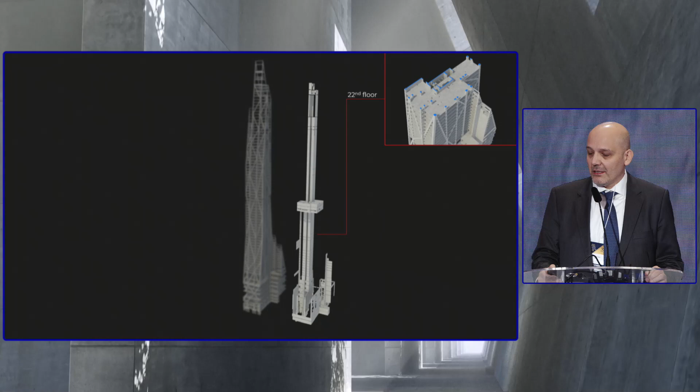If you don't need them, we don't use them. This is another lower floor. This is...

So this is where you see this transfer of the core. Right now we are at the 7th floor with the amenity space. We have a pool on the south side. This is a pool space. And we started to transfer our main structure in the tower right above the...

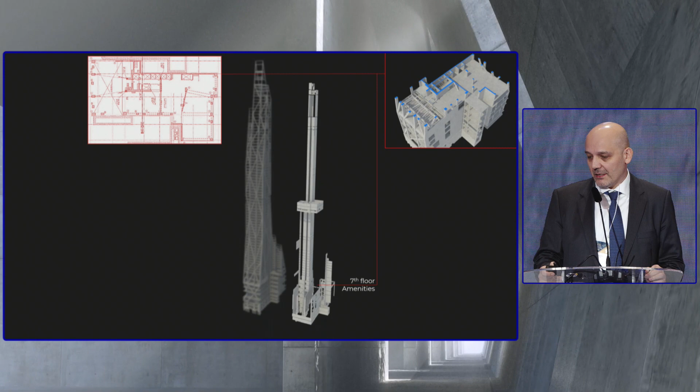MoMA museum space. So this is the museum space that MoMA uses today. This is the extension of MoMA, attached to the MoMA Museum, which is east side of it.

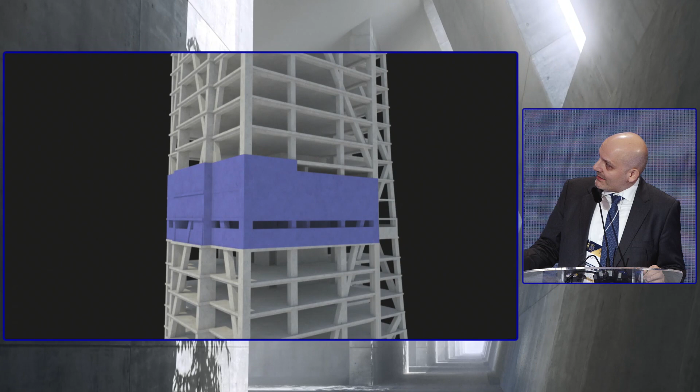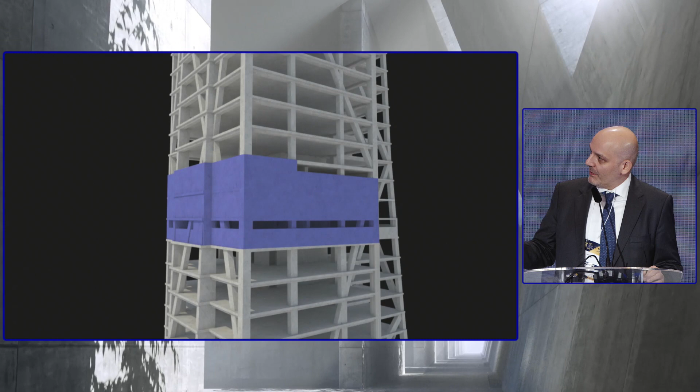So this is a view of the structure, basically. This is our transfer floors. As you see, we allow openings here for the mechanical space. We allow them to use the whole space, so this didn't create any additional mechanical requirements. We work with the mechanical engineer for the openings, and we provide them the necessary openings that they needed throughout the building life.

So this is a view under construction. This is a view from the lower floors, but this is basically the steel transfer floors that transfer the core above the MoMA space.

We did this in steel because it's faster. You could have done it in concrete, but steel was faster. We provide options to client contractors, and they decided to go with this.

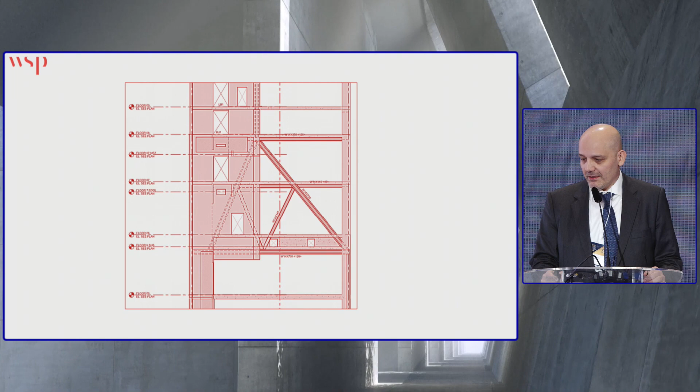So we provide this. So this is a drawing, and this is actual construction. So majority of these items are pre-assembled and they transfer to the job site.

This is one example of early planning sizes, tolerances, and exact construction schedule. That's where the difference starts to make it.

As you see, all these buildings are slender. They are slender because there's very limited floor area. So you try to structure a building that doesn't require too many people at the same time on the field. But in another way, it has to be synchronized, it has to work like a clock.

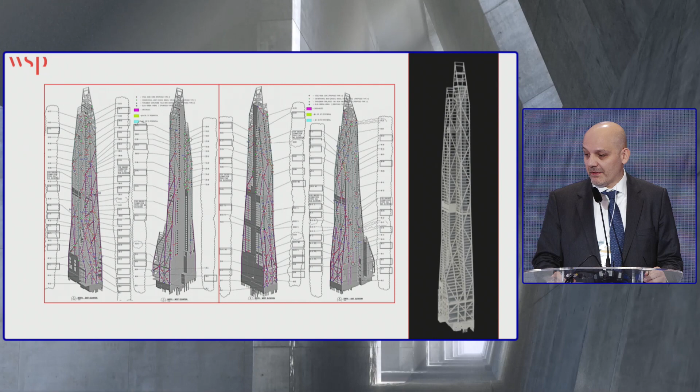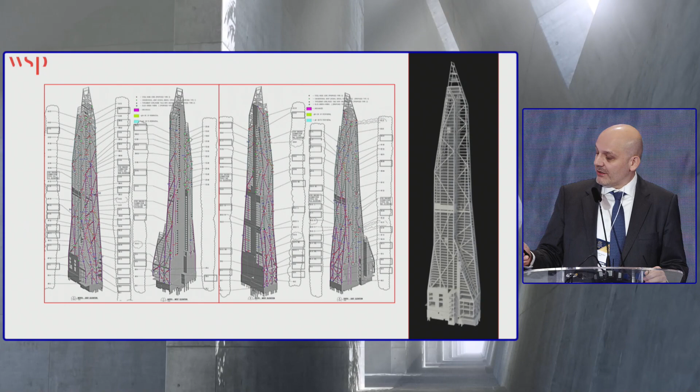Although, here you see in this picture, although all these diagrids are concrete, there are additional diagrids there which the architect wants to just put in the building. So we didn't use them because we didn't want to make the structure more complicated or create more nodes. These diagrids connect, and there are some diagrids with 8 connections coming to the same point.

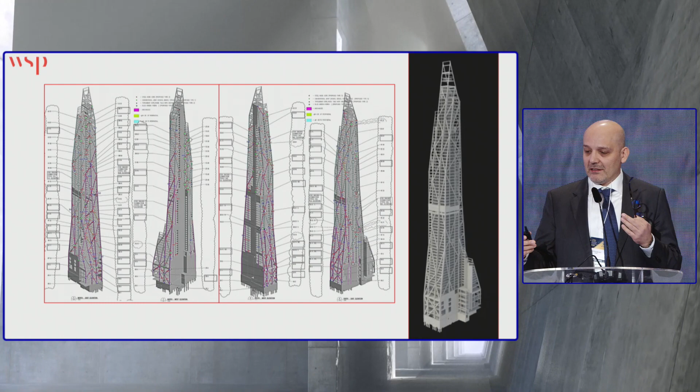When the forces are too high, the space is limited, and you have to provide a speed construction, these are very important items. And with all this complexity, let me repeat it, we did a 3-day cycle for this building.

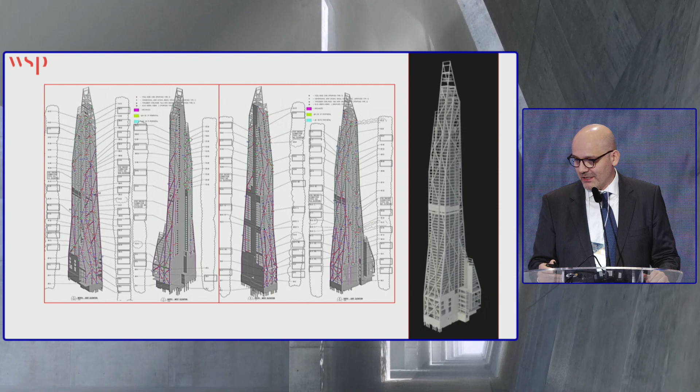So in this one, you see, whenever it's red, these are - if you go see the building today, you see a line here, these lines, in the facade, but they are not concrete. This is what the architect insists to have. What we have is the blue ones.

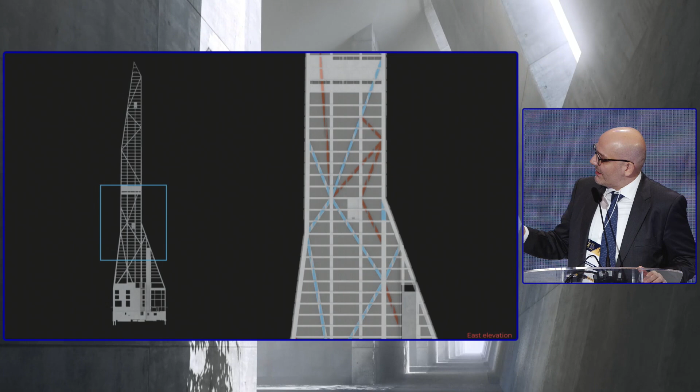We place the diagrids where we need it, where we think it's efficient, just to reduce the degree of complexity in the structure and the constructability. We want to increase the constructability of the structure.

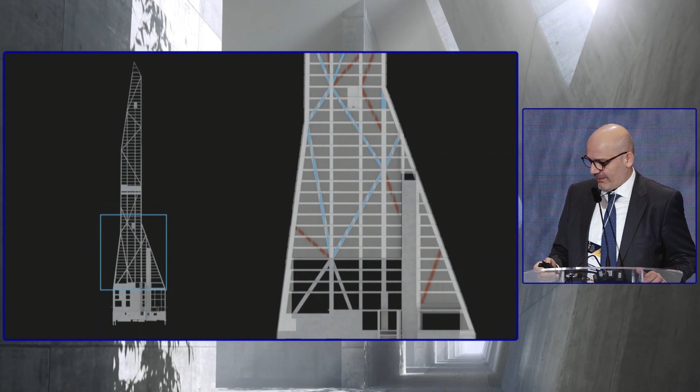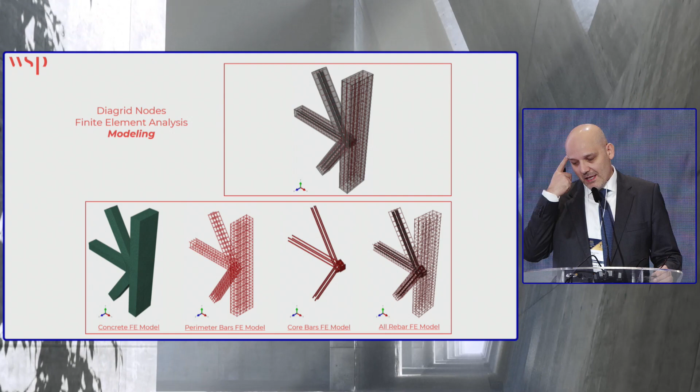So this is how we approach projects. We engineer and detail almost every element ahead of time. We have to make sure that it fits, it's buildable, and it works. So we provide several options to ownership and the contractors on how they can build the corners.

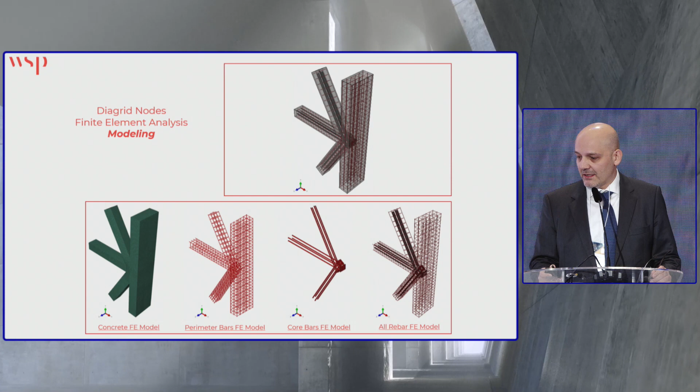This is a finite element analysis for the modeling that we did, extensive analysis for the interactions. These are the nodes that we did the finite element analysis on.

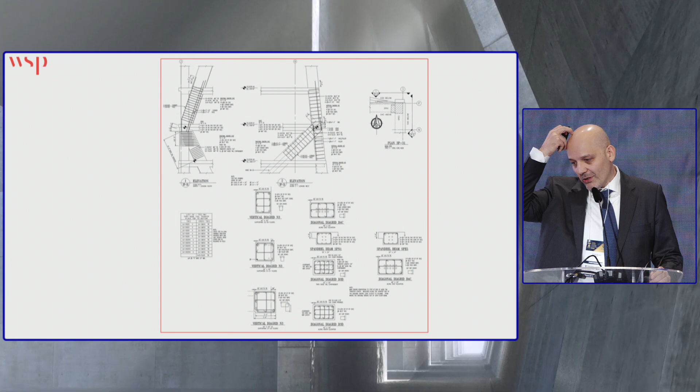These are early details that we provide to the owner just to understand what they want to do, how they want to do it. And this is basically what we ended up with. So what you see here is when the connection is so complex, we provide a steel node in here.

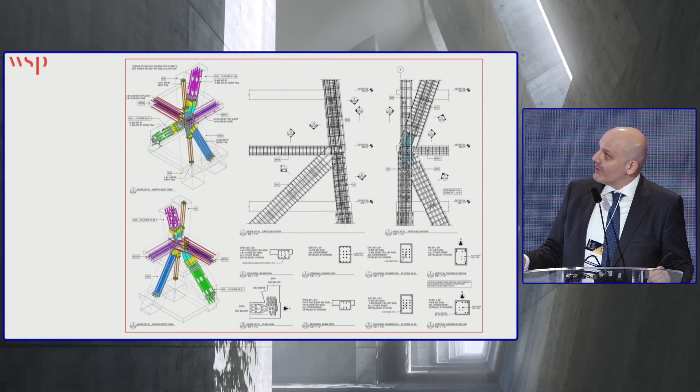So this steel node is pre-assembled, and everything is - I will show next slide - pre-assembled in the warehouse and shipped to the field. And with this detail, we still managed to get a 2.5 day construction schedule.

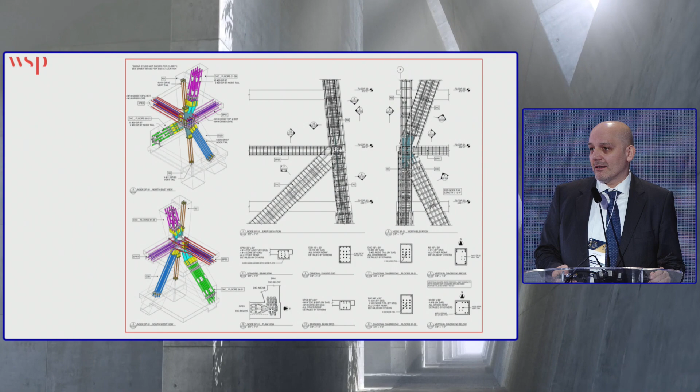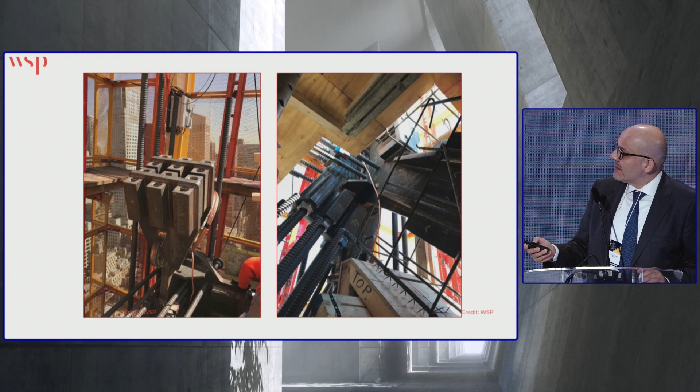This is installation. Okay. Okay, we're supposed to, yeah.

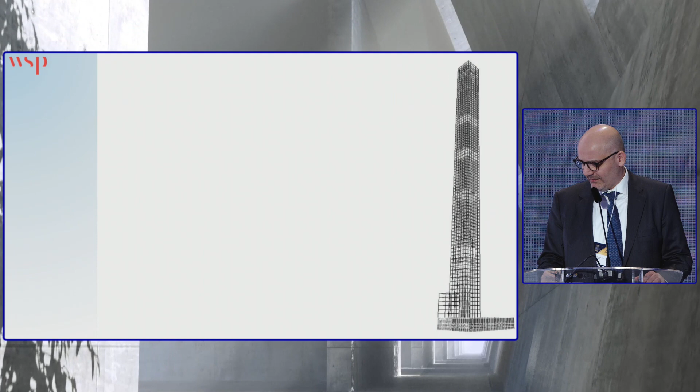We will talk a little bit later. So in this building, because of the shape, as you can imagine, the wind was very high, and the wind forces on the structure were very high. So they didn't want to change the shape because of different reasons.

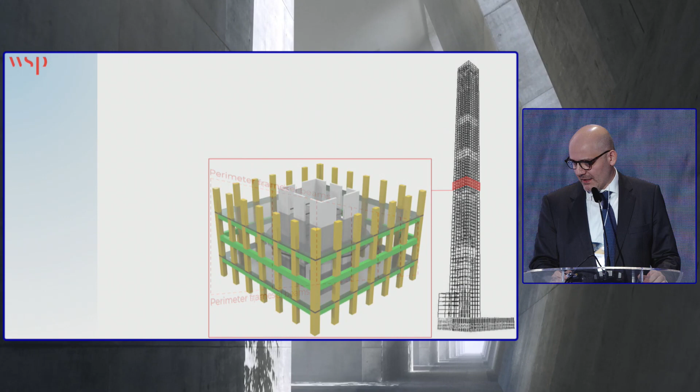What we offer them is, when you see the red floors, these are mechanical floors. This is a typical floor plan. This is a concrete shear wall and perimeter spandrel beams, columns. So what we offer them is this solution.

So this is a mechanical floor, and this is what we call a drum. What it means is here everything is exposed and open. This allowed the wind to travel through the building and reduce the wind effects on the building. This saved a lot of money, and we were able to reduce the sizes.

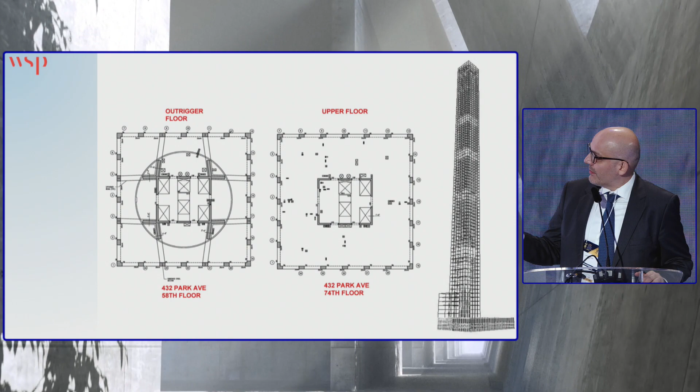Although we have this, we are able to do an outrigger floor. We are able to connect the core to the outside columns to stiffen the building up.

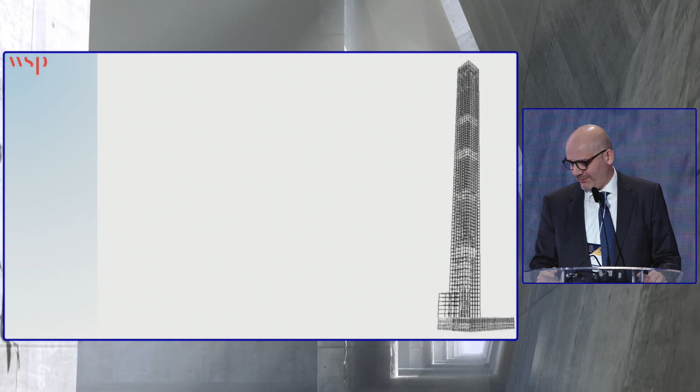Okay, this is another drum, and you see the outrigger connections. Yeah, this allows you to go through. This allows the wind to go through the building.

This is 111 West 57th Street. So this project, as I said, this is a very small project, and we had a lot of thinking process. We put up front the building.

So what the south side of the project basically, just one second. Yeah, the south side of the project sets back along the building. And one of the early designs, we were thinking about putting a column, but at the end of the day, we removed the column just because we want to give more freedom in this area, because there's no space. And on the north side, we have only 2 columns throughout the project.

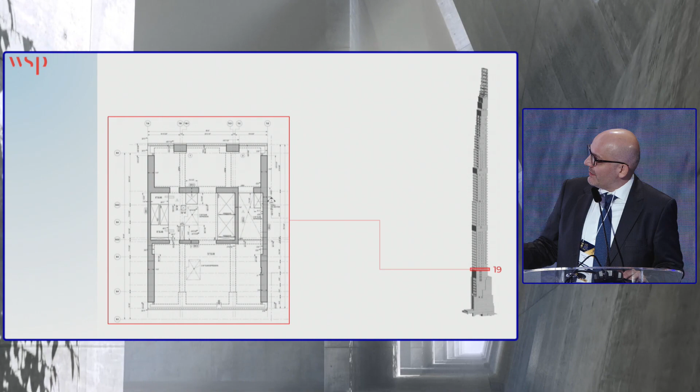The rest of it is side walls with openings in them. Above the project, on the top floors, we started to reduce the length of these sidewalls. This is an outrigger floor, and we had 4 here. This is a section of the outrigger floor.

Main design considerations - we early on engaged the wind tunnel, especially when you do very special structures like this. You want to get wind tunnel input early in the game.

Also, it's a commonly known fact today that the wind tunnel, the code doesn't address the wind loads on the buildings very correctly. They don't address the dynamic component, they don't address the location, they don't address the geometry. There are a lot of things that they don't address. Basically, when you have a building that is this significant, you want to have a wind tunnel, and you want to have a wind tunnel early in the process.

So there are some cases we ask the client to entertain the idea of changing the shape. Changing the shape is basically outside - if you do it outside, you put, say, balconies to confuse the wind, just to break the wind. Or in this case, they want to have the same shape because they don't want to do additional construction of the shape. They just want to have the basic form just going up, which is a 2-day cycle.

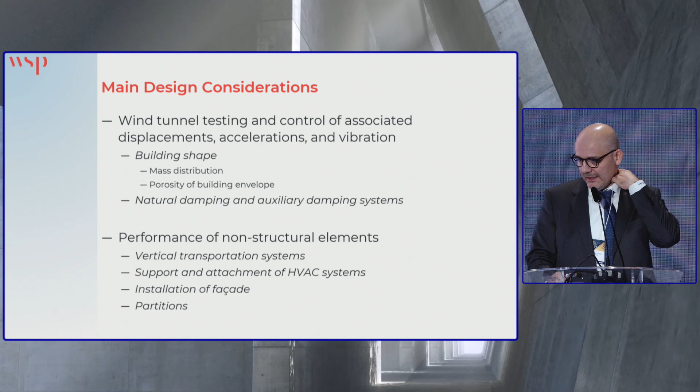In this case, we asked if there is a possibility to have open floors. The architect liked it, the owner liked it. There was no problem with the building department at that time. And it moved on, the job is in progress. Although we had a 1,400-foot tall building, we have very successful, reasonable sizes, if you can imagine.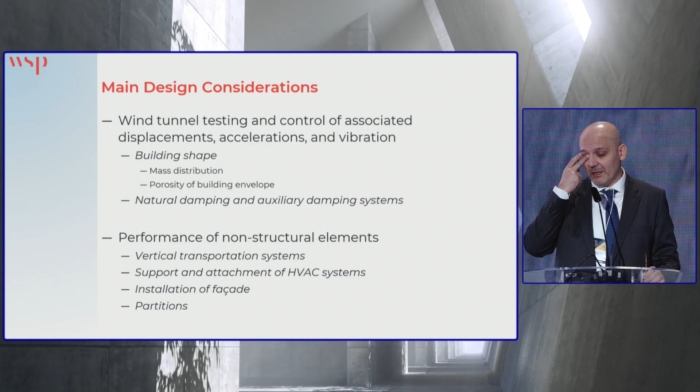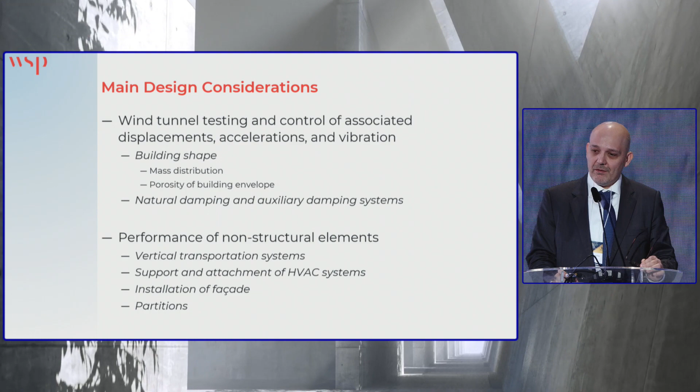So also in our projects, we look at the comfort criteria, and we have a very good understanding of concrete buildings, steel buildings, tall buildings. We have been where we are with all these years of experience in high-rise buildings. We have extensive data, so we understand how the building works, and we understand what we should expect when it's constructed in a certain way.

But this also requires a very strict observation, especially for concrete buildings - what kind of materials you put in the building, what's in there, and what's the result of this.

Since these buildings are doing a 2-day, 3-day cycle, if there's a problem, by the time you catch it—say on a 7-day cycle with 7-day breaks—it may be a little late. So we want to be in charge of all these materials. Although we push the materials, we put special regulations when we define the materials in our buildings.

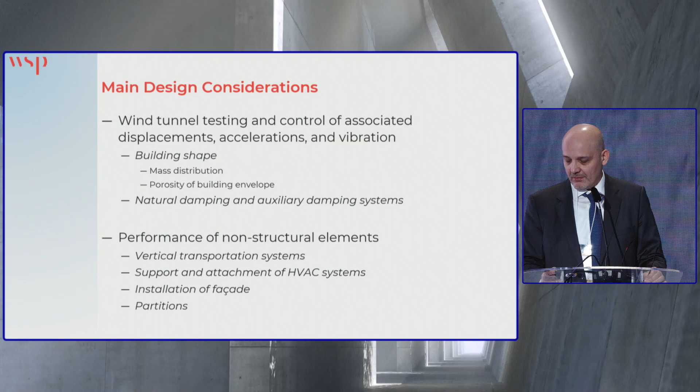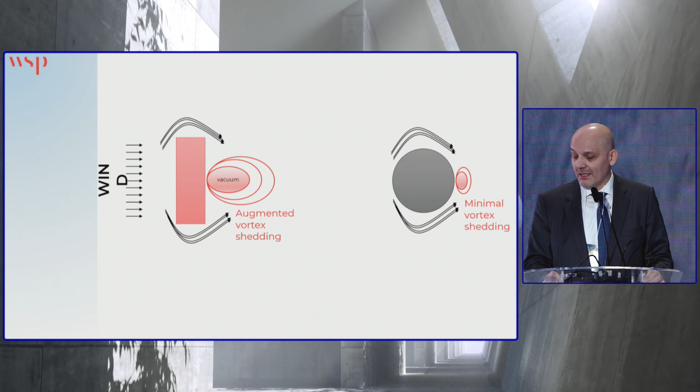This is well explained, these phenomena—I'm just going to go through them. Vortex shedding is a very big problem in rectangular buildings. Also, when you do a wind tunnel test, you want to account for existing conditions and future conditions. It's very important to know who's going to build, and what impact that will have on your building.

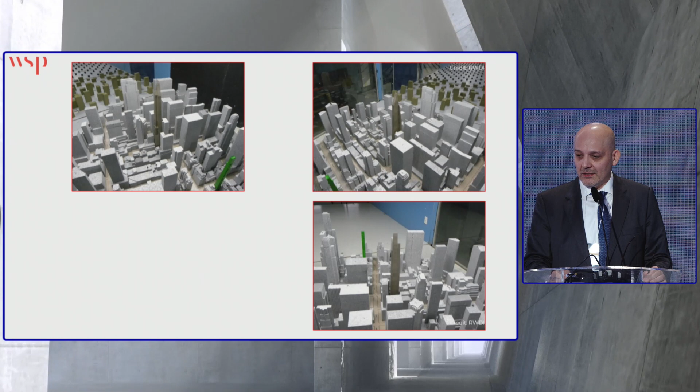Buffeting is another common problem in tall structures, especially—at MoMA we had an issue because of the two towers you see on the right side.

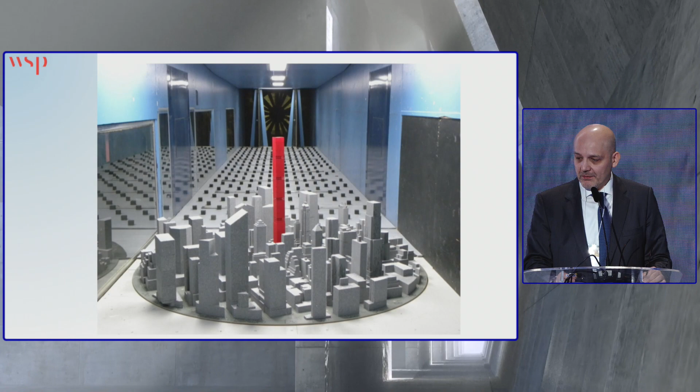So this is a wind tunnel test for 432 Park. These are the open drum floors that we have with the circle, to get the wind moving through. Also, there's another thing we did on this project, and we looked at that option too.

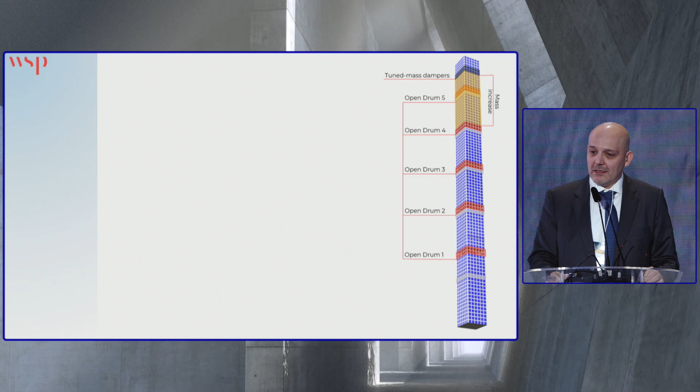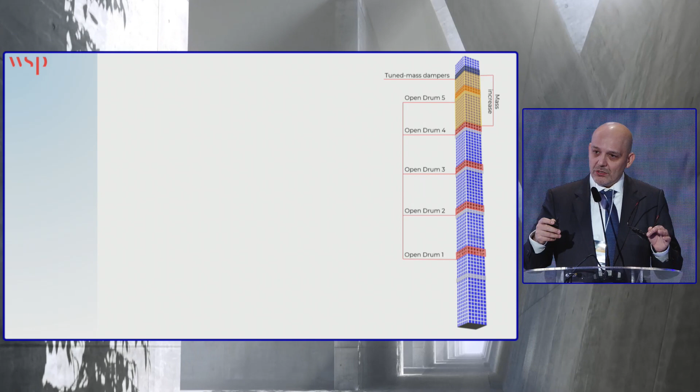Sometimes, although you figure out that you need a damper in the building for comfort criteria, you don't have to address the whole thing with a damper. So we also look at other options, or sometimes a combination of two options. One of the options we look at is whether we can increase the mass of the building toward the top, which is the generalized mass—we try to increase the generalized mass to address or reduce the acceleration issue.

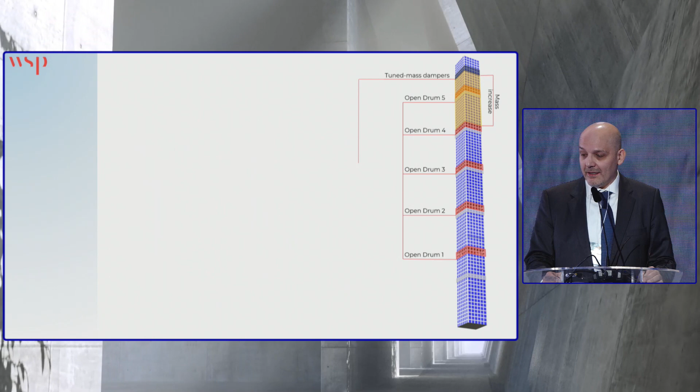So in this building we have 2 mass dampers, and at the time it was the biggest one. Added up, now we have 270 Park and West 57 is the biggest one.

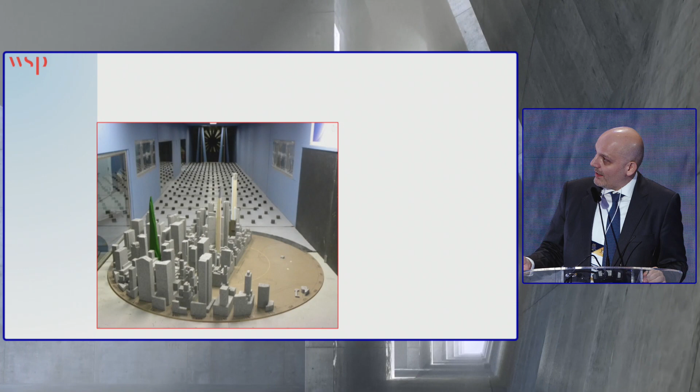So this is another wind tunnel test. We were the engineer for this tall building. In this one we tried to see what's the impact of the other buildings on MoMA, if there's any—so you see the MoMA tower under test. This is 111 and this is 217 West 57th Street. This is the top detail of 157 West 57.

This is a wind tunnel representation of how we let the wind flow through this building. We have multiple open floors in this one. The client wants to have some level of balconies because the code doesn't allow you to go to a full floor opening, so there's a parapet in there because of code regulations. But these floors are open and attached to the triplexes and duplex units. Some of the duplex units throughout the building have open floors utilized as terraces.

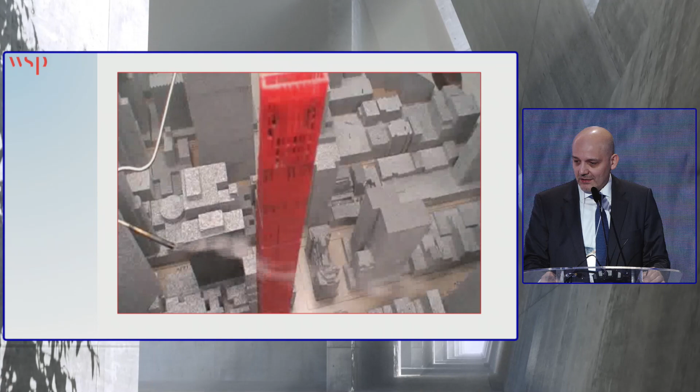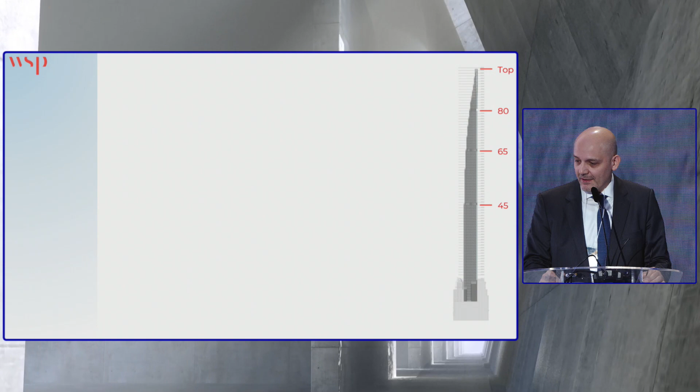This is a wind tunnel test—I'll just go through it. So these are the floors where we have the open floors. We let the wind flow on top of the open floor at the top, through the steel structure.

So we also employ dampers on these special structures, and the dampers we employ today are all passive dampers, but we're also looking at options for semi-active dampers. The knowledge, expertise, and data are quite good today—we have quite good data that these auxiliary systems are working, and working very well. We look at different criteria.

We look at the 10-year criteria, which is the North American standard. We also look at the 1-year criteria—it used to be 5-year, but now they changed it to 1 year for ISO criteria. This is a period-dependent criteria. On top of that, starting with the super slender tower, we started to look at the 1-month criteria, which is the wind event you will experience a lot.

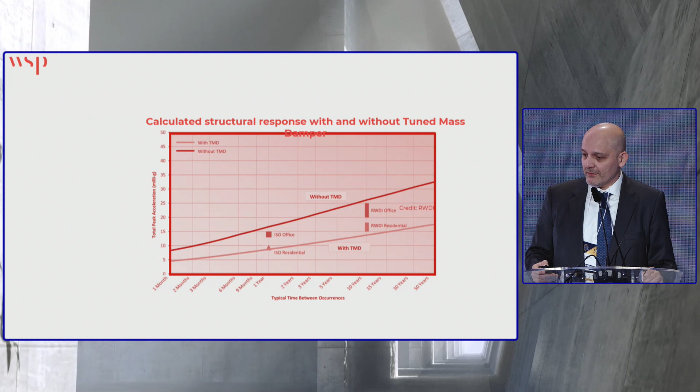So we provide these options to the client, and a study goes with them, and they make a decision. Sometimes we increase the building height, maybe a few meters, to put the tanks in there. These are much cheaper compared to the tuned mass dampers.

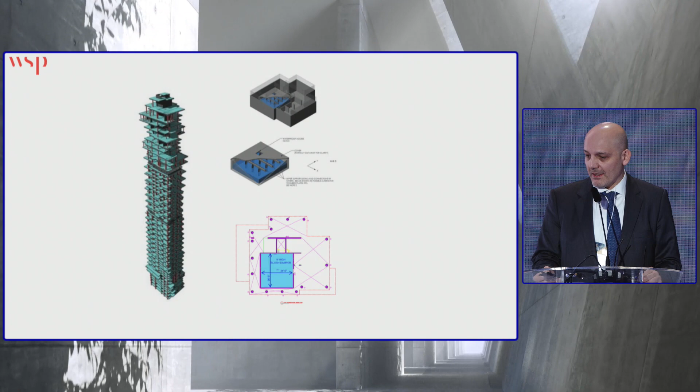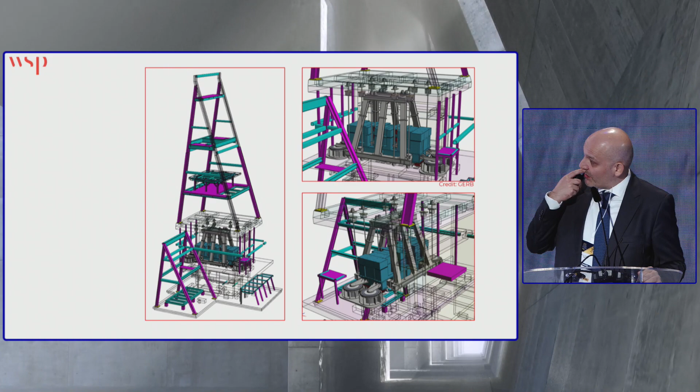So this basically shows you a column slosh tank, how it works. This is a damper on top of the MoMA tower. Above this, we have a BMU unit, which is a window washing building maintenance unit. As you can imagine, this is a very special design because everything was sloping, there was no space.

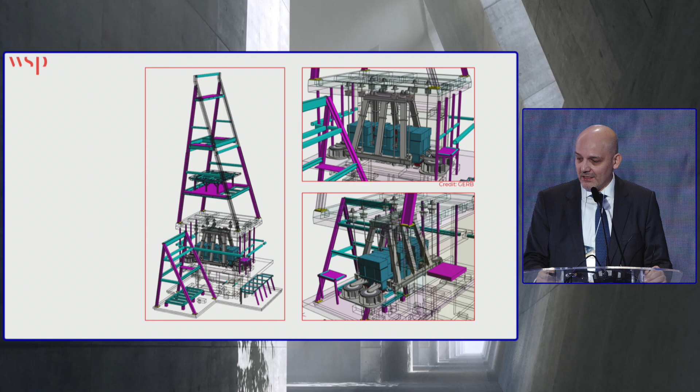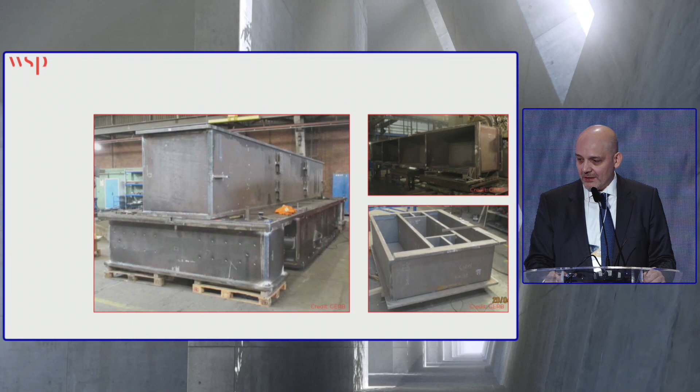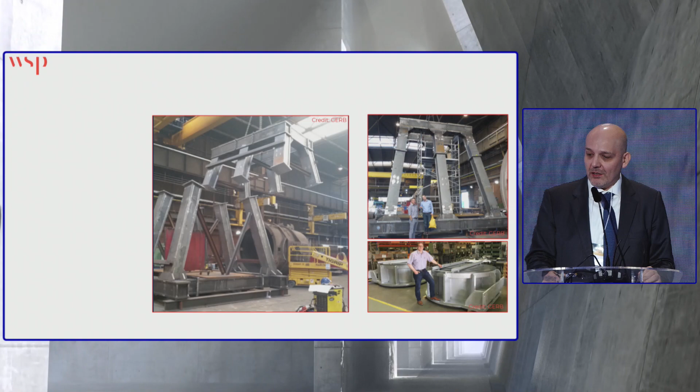This is when it's under construction. This doesn't necessarily have to be steel. Sometimes we do buckets, meaning there's a steel bucket and we place concrete in there. This is something we discussed with the team, which is faster because these items have to be lifted to the top of the building, and having a crane for a certain amount of time is extremely expensive in New York. So in this one, we have buckets filled with concrete. The ownership was okay with that because they wanted to pour it with the other structural concrete members.

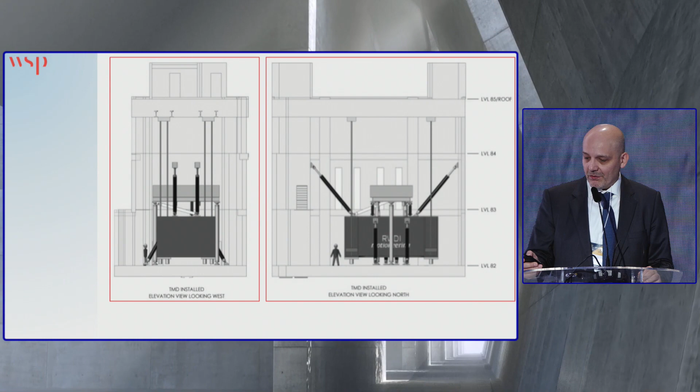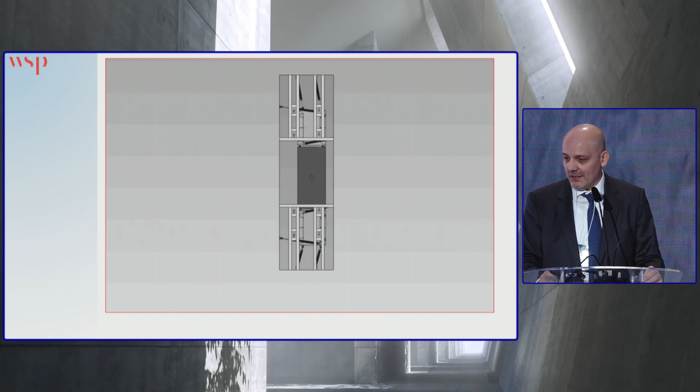This is a TMD view of the TMDs in 432 Park. We have 2 of them, and because of the space requirement we couldn't have one, so the core goes in between. At the time it was done, it was the biggest tuned-mass damper. This shows you how this works in action in each tuned-mass damper. This also has concrete - a steel bucket and concrete fill material to save money.

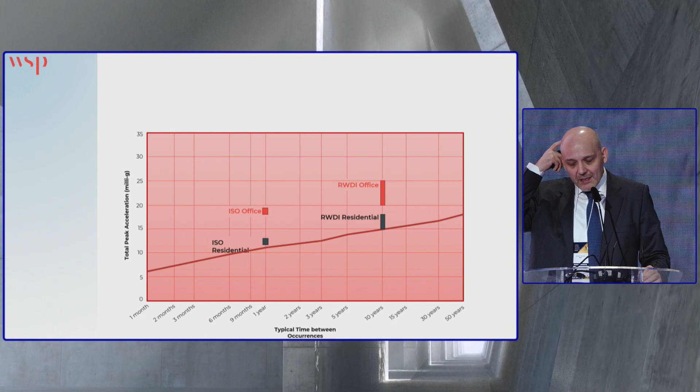There are different designs for tuned-mass dampers, but from 2004 up to this year, the number of dampers in that 15-year range has doubled, especially in New York. The number of them has just doubled because of the need for them - now we have a lot of data, we understand how they work, and our systems are much more inclusive now. So we use this as a tool where we need it.

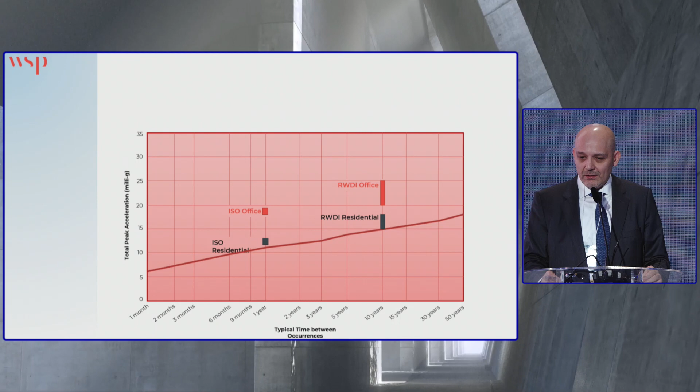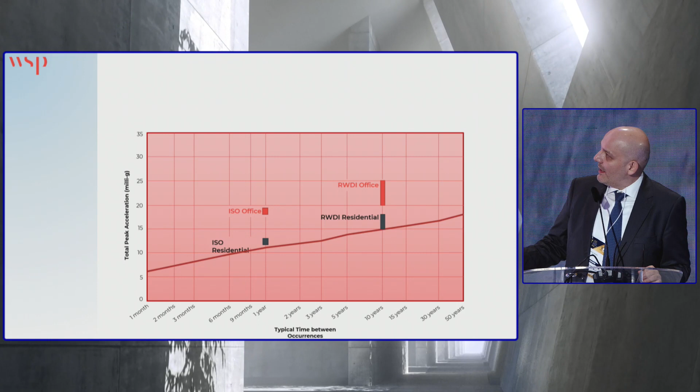Basically, this is the acceleration criteria we look at. This is ISO criteria for 1 year, and this is North American criteria for 10 years. This is residential and this is office. We also look at the 1 month criteria as additional.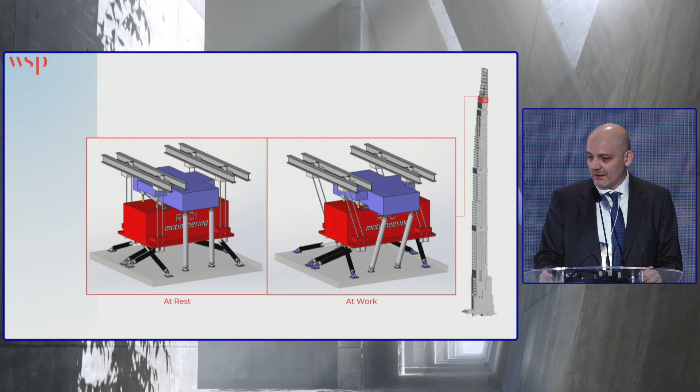This is another damper - 111 West 57th Street. This is a special damper also. Again, we have space issues, as you can imagine. This is at the top of the building, and we have just a detail. You have 2 sets of masses in there: this is the destabilizing mass, and this is the main mass. You try to achieve a longer period for the building.

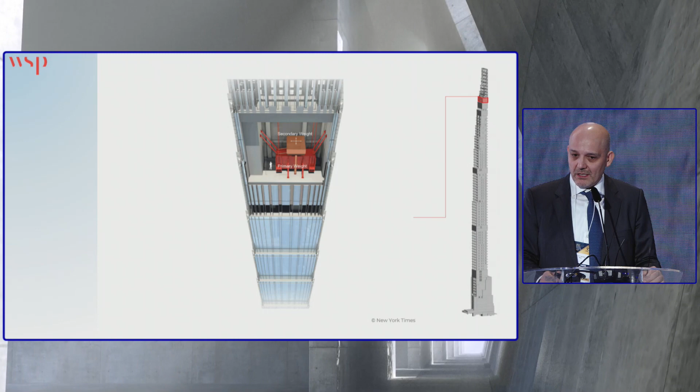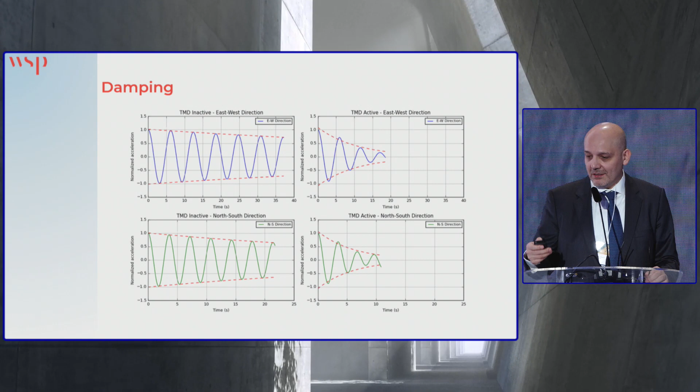This is basically some data. You see how effective dampers are. You see when they present dampers in action after they commission them - you see the dampers' effectiveness.

This is data that shows what happens - we have our consultants, wind tunnel and damper designers, who heavily depend on the information that we have. So it's very important to understand how your structure is going to behave, what to expect at the time of construction, and what to expect after a major storm.

This shows you around our structures, how we calculate them, and at the end of the day there are real measurements before they commission the dampers. It's close to a 5% range. So we have an understanding to reflect into the field that there's going to be around 5% difference between what's expected to behave and what's in the real field.

This may be a major issue. Sometimes you see buildings finish after the engineer says there's a need for a damper. They do the calculations, they do the measurements, and you see there's no need for a damper. Sometimes it can be the opposite.

So the important thing is, in this, you have to understand the materials very well. You have to assess the information very well, and you have to observe the structure through construction. Every project of ours - we know every floor, what the concrete strength pour was, what comes out of the tests. Not only concrete strength, we also look at the MOE, everything. So we have extensive data, and we hold this extensive data to understand the structure.